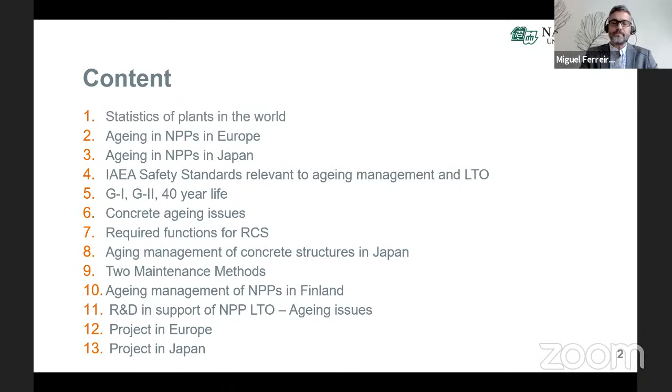And more than a quarter, 27%, are even over the age of 40. So we have a lot of power plants that are aging, and most of these power plants were given in the beginning an operating license for only 40 years. So these plants have reached this age, or are reaching this age, or in some cases have already passed this age. And we know that when structures age, their performance starts to decline. This is natural, subject to different types of loading, mechanical and from the environment.

And that is the main reason why we have to have in place a program that manages the aging of reinforced concrete structures, whether we're talking about power plants or different kinds of infrastructure as well.

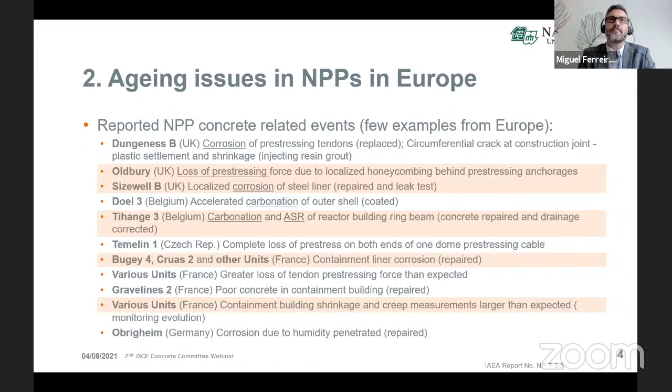Here is one case I would like to highlight, where we had ASR found in the roof ring beam. So we have the containment structure, and on top of it there's a circular beam around the roof. There was very poor drainage on top of that roof, so there was accumulation of water, and because of this, the humidity was high. And the aggregate was reactive, so ASR occurred on that ring beam.

Otherwise, the concrete structures of nuclear power plants are subject to the same aging mechanisms: chloride-induced corrosion, ASR, sulfate attack, etc. However, what makes the aging different in the case of nuclear power plants is the uniqueness of the structures themselves.

The containment building, for example, is a structure 1 meter thick or more, and it's very heavily reinforced, more than conventional structures, with pre-stressing tendons, sometimes both in horizontal and vertical directions, and it can have a steel liner embedded or on the surface. Sometimes there's even a double containment. So this makes the typologies we are dealing with quite unique, and we don't have experience with those kinds of typologies and aging mechanisms.

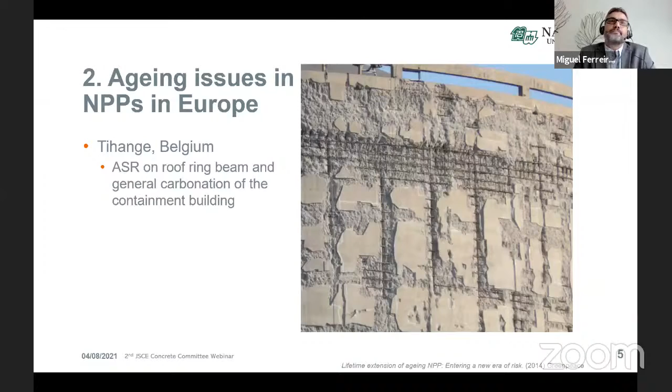So now about Japan, Professor Maruyama.

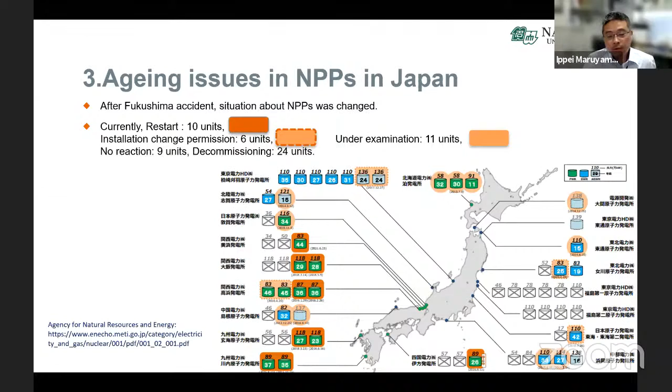So we really need to investigate and prove the soundness of the structure of these nuclear power plants. After the Fukushima accident, the situation about nuclear power plants in Japan changed dramatically. Currently 10 units have restarted, 6 units got permission to make installation changes, and 11 units are under examination. 24 units are under decommissioning due to reasons brought by social environment change after the Fukushima Daiichi accident. So even though many nuclear power plants will be decommissioned, the utilities still want to operate the nuclear power plants. That is our situation. Could you go to the next one?

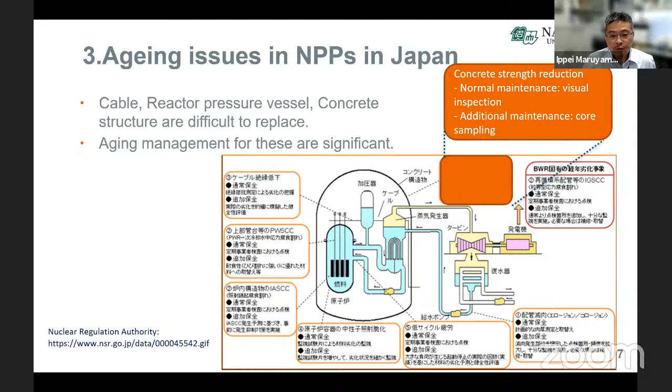In Japan, we are also concerned about the seismic performance of nuclear power plants, so the concrete strength and stiffness change are crucial. Generally, periodical visual inspection is conducted as normal maintenance, and additionally, evaluation of the concrete performance using core samples is conducted. So that is the situation of the nuclear power plants in Japan.

Please go ahead. Thank you.

So there are standards, many different levels of standards from different origins. The IAEA, which stands for the International Atomic Energy Agency, has safety standards that reflect international consensus on what is considered a high level of safety for protecting people and the environment. These standards cover all types of nuclear and radiation applications, and they come in three different types: safety fundamentals, safety requirements, and safety guides.

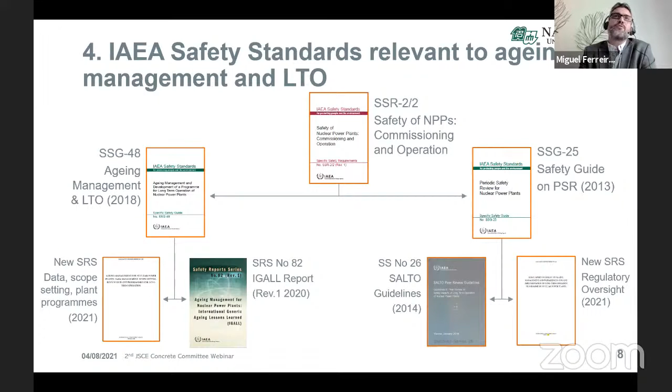There's a lot of information, but this is general, more high-level information and not very specific to concrete structures. It talks about SSCs, system structures and components, in a generic sense. I have taken one figure out of that, and this is quite a well-known figure.

There's a lot of information on this as well in the IAEA documents, and I would encourage you to look into this in depth, as most aging management programs are developed based on this framework.

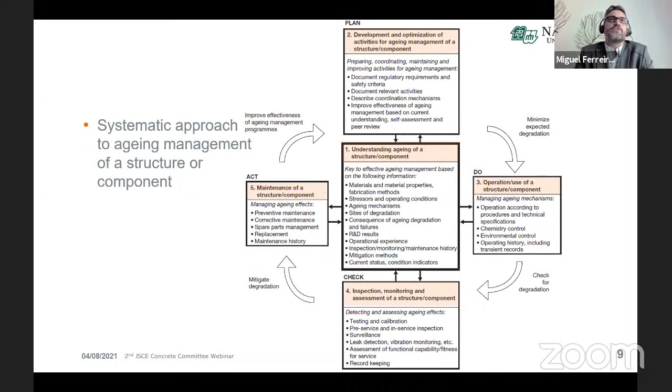Oh, sorry. Did I jump a slide? Have I jumped a slide? No, okay.

Many people ask, why have reactors been designed for 40 years when we can design bridges already for longer service lives than that? The reason is that the limitation of 40 years wasn't a scientific or engineering limitation, but a limitation by the Atomic Energy Act that limited all operating licenses of reactors to 40 years. So it was never really a question of technical performance.

That is why many plants that were designed for 40 years and have been operational for 40 years are actually now already performing, in some cases, up to 50, and they have intentions to go up to 60 as well. So this 40-year design life was never an engineering barrier.

Generation 1 are prototype reactors, developed in the 50s and 60s, and most of these are shut down.

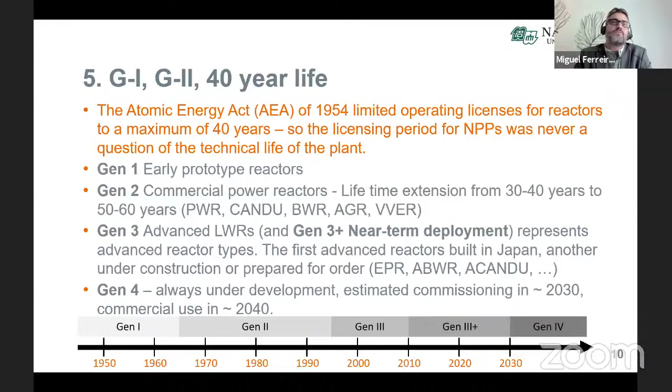Professor Maruyama. Okay, thank you.

Regarding the concrete aging issues in nuclear power plants, as Miguel said, for the extension of the life of nuclear power plants, we have to evaluate and prove the soundness of the concrete structures, and for that purpose...

There are many discussions, and there is a reference published by the United States NRC, reference number NUREG/CR-7153 Volume 4, published in 2014. Based on a discussion among experts in the related field, this document identified the following issues to be studied. The first one is creep of post-tension.

The impact of moisture on creep, multi-axial impact, and the coupling with accidental loading - we have qualitative information, but quantitative information is very difficult to predict. For this purpose, we need additional research.

And the impact of irradiation on concrete - we have some basic information, but everything is not clarified yet. So we need additional research on the impact of irradiation on concrete.

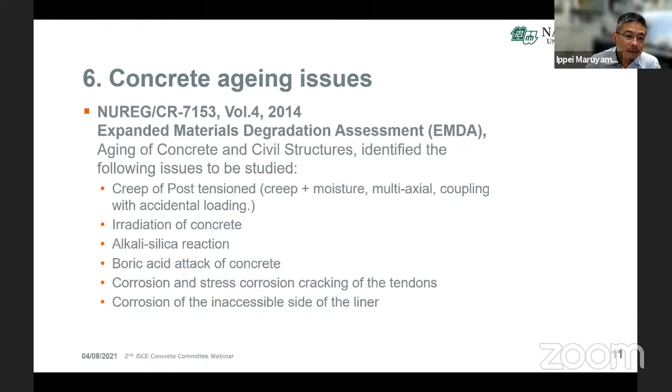So there is some difference between the concrete in nuclear power plants and the concrete used in general civil infrastructures. That is related to the required functions. The usage function is very general - common to general civil infrastructures. But other than this, there are functions specific or characteristic to concrete in a nuclear power plant.

The supporting function is to support the equipment to generate electricity. The pressure proof function is for the accident. The shield function is to attenuate the radiation from the reactor. And the leak-proof function and negative pressure holding function are functions to keep safe conditions against radioactive materials.

The secondary accident prevention function is a kind of meta function, which means that building elements shall not be damaged, fallen, or overturned so as to interfere with the functioning of more important facilities. So we have to think about any kind of accidental phenomena and keep the safe condition of nuclear power plants.

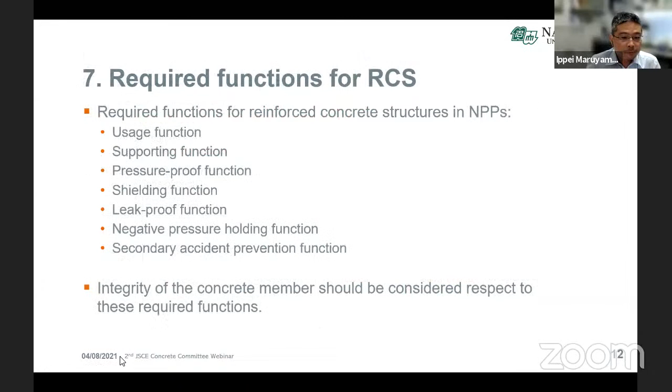So the integrity or soundness of the concrete member should be considered with respect to these required functions.

In case of the aging management of concrete structures in Japan, after the Fukushima accident, our new nuclear reactor regulation law came into force on July 8, 2013, and an approval system of extension of operation period of nuclear power plants was introduced. So companies are allowed to operate nuclear power plants up to 40 years, and after that, they can apply for permission to extend the operation period just one time. So in general, the lifespan is 40 years.

But if we get permission from the regulatory body, the utility can extend the operation period up to 60 years. The extended operation period of a nuclear power plant will be at most 20 years, as I mentioned.

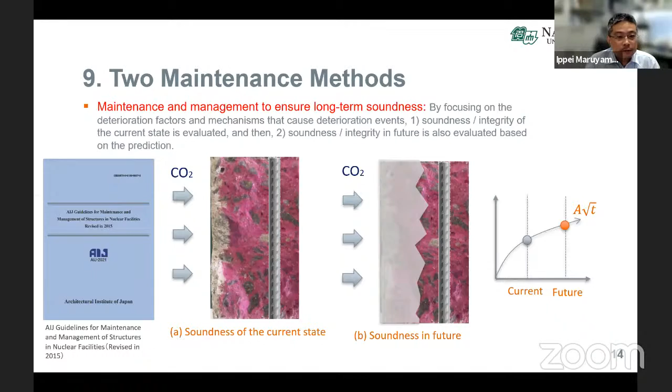So Miguel, I return to you. It's muted. Miguel, it's muted.

Thank you. I'll talk a little bit about aging management in Finland, defined in the YVL guide A8, aging management in a nuclear facility. The regulator in Finland, STUK, has adopted an approach where it specifies the aspects that need to be addressed by an aging management program of a power plant, but allows the plant to decide how to address them. For describing aging management procedures and identifying aging mechanisms, there's no specific guidance, but utilities have to take the initiative and show the regulator what procedures they have in place, how they plan to identify foreseen and unforeseen aging mechanisms. So the guidance comes from the regulator, but the onus is on the utility to demonstrate that what they have adopted can fulfill the regulator's demands.

I have a list of some aspects the power plants have to fulfill. For example, they have to document all procedures, or have procedures in place that identify existing or new aging mechanisms. So how do you identify new aging mechanisms? This obviously means you need to be up to speed with R&D.

I have another slide which shows a bit more, and I'm not going into detail, but this document is complemented with an annex at the end with a detailed list of aging mechanisms that might occur at nuclear facilities, as assistance to the power plants. If you're interested in reading this document, it's quite long. I leave you the link to the website where it can be downloaded. All the Finnish regulator guidelines are in English, Finnish and Swedish, and can be downloaded for free from this website, if you have more interest in going deeper.

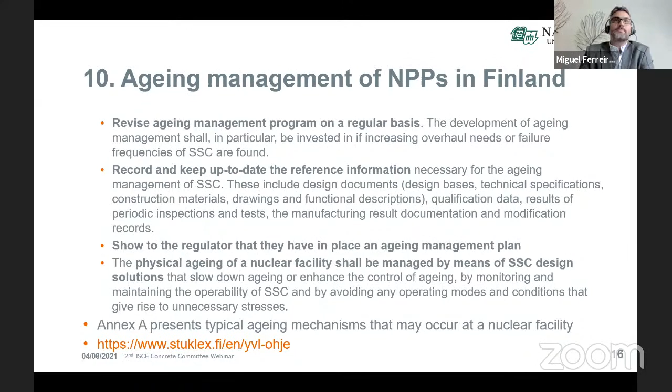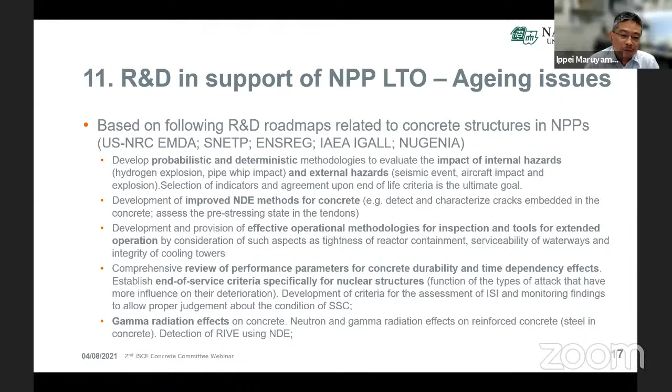I didn't read everything, but please check this list afterwards. I think if you find it interesting, this list of research topics needed from the Nuclear Power Plant Society will be interesting.

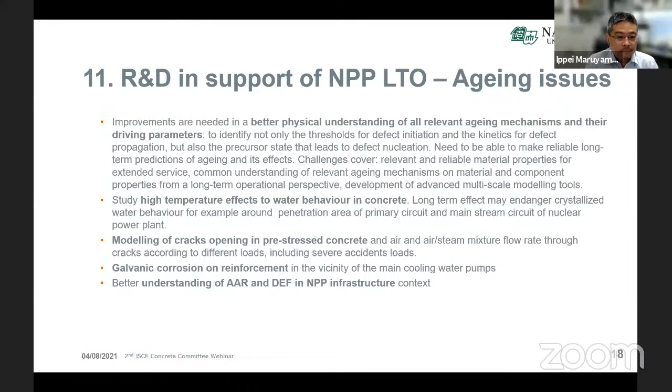Yes, thanks, Ippei. Definitely look at this quite comprehensive list of topics, and I'm sure there are many more. Coming towards the end of the presentation, we'll talk a little bit about projects in Europe and Japan addressing aging management issues in nuclear power plants.

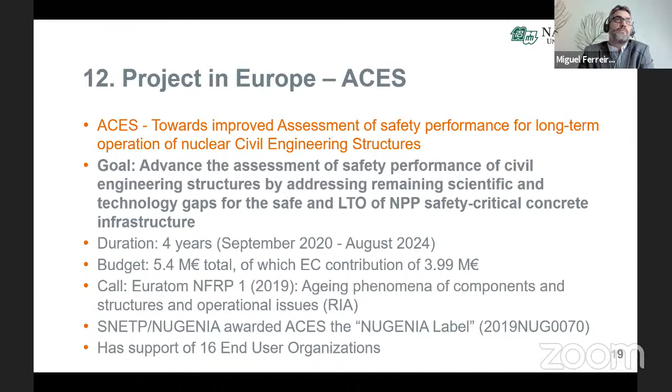One project in Europe is called ACES, titled Towards Improved Assessment of Safety Performance for Long-Term Operation of Nuclear Civil Engineering Structures. The goal of this project is to advance the assessment of safety performance of civil engineering structures, by trying to address the remaining scientific and technology gaps for safe and long-term operation of safety critical concrete infrastructure. I am really happy and lucky to be the coordinator of this project. It started approximately a year ago.

So we have work package 1, which is looking at the aging management aspects in general, looking at the documentation and processes, etc.

And then we have 4 work packages which go from work package 2 to work package 5, which are looking at very specific knowledge gaps. Work package 2 is looking at embedded liners and the corrosion of these. Work package 3 is looking at internal swelling reactions, so this is ASR and delayed ettringite formation as well. Work package 4 is looking at delayed strains of the containment building, effects of creep and shrinkage, and temperature and moisture. And work package 5 is looking at the performance of irradiated concrete. So these are the 4 main, let's say, technical work packages.

We have a very strong interaction with the end user group. We have 15 or 16 end user group partners at the moment, and I think we have one partner from Japan, which is Kajima Corporation, and we're very happy to have them with us as well. And then all this information feeds into a dissemination and communication work package.

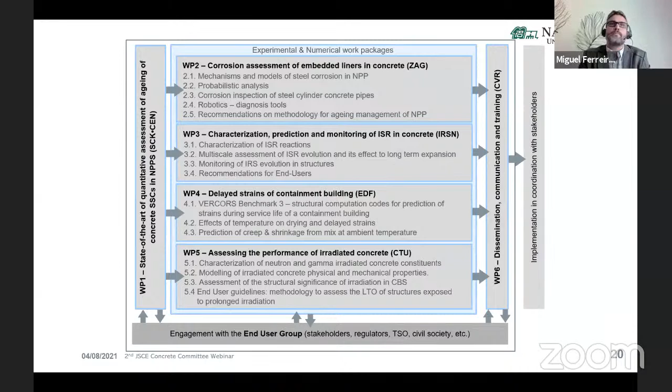Thank you. Japan also have several large concrete projects for the long-term operation of nuclear power plants. I would like to introduce 2 of them, which we have a role of the technical lead.

So first is the so-called Hamaoka project, funded by the Ministry of Economy, Trade and Industry of Japan. Units 1 and 2, owned by the Chubu Electric Power, are under decommissioning. The objective is to improve the assessment of soundness of the RC members in the nuclear power plants based on new information from the data harvested from the decommissioning of nuclear power plants, and enhanced non-destructive methods validated by the data from the real members and the numerical analysis.

In the project, we took more than 500 cores from the real structure, which have been exposed to different or specific environments in the nuclear power plants. We found that there is some similarity with the Roman concrete, and we can find aluminum tobermorite formation in the concrete under the irradiation condition. So from a scientific viewpoint, this is also very interesting.

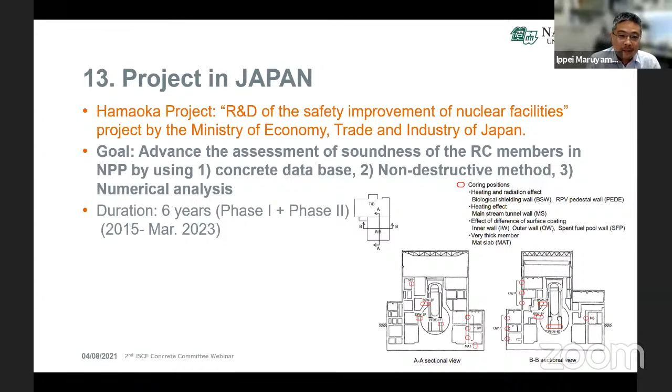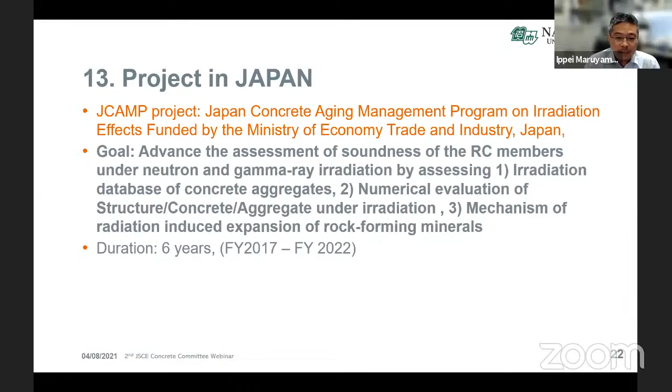Thank you. So the other is a project named the Japan Concrete Aging Management Program on Irradiation Effects. This is also funded by METI, and the degradation mechanism of concrete due to neutron irradiation is investigated. The detail will be introduced in my next presentation.

And this project is under the umbrella of the US-Japan Civil Nuclear Energy Research and Development Working Group. As you see, many research institutes joined this project.

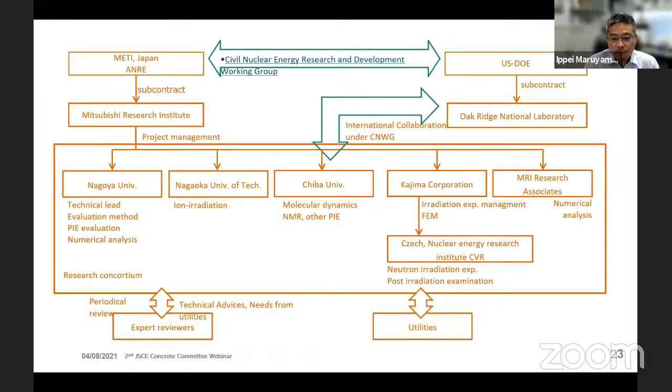And finally, as concluding remarks, what I would like to say is the social demands require accountability from all parties involved, and the aging management of concrete structures requires transparency throughout the whole process. The long-term operation of nuclear power plants needs a solid scientific background, and engineers should pursue a process beyond engineering design when assessing reinforced concrete structure performance in support of LTO. So that is why we should do the research for the LTO. Thank you for your listening.

Thank you very much. Thank you for a very valuable presentation, Dr. Miguel Ferreira and Dr. Ippei Maruyama. So there is much valuable information on nuclear power plants, including the background, current situation, and management system of nuclear power plants in Finland and Japan. And also there are remarkable degradation phenomena and research projects as well.

Okay, so I'd like to move on to the next session. So among these topics of the overview, today we are focusing on the internal swelling reaction, which is ASR, and the irradiation of concrete materials. So first we will have advanced topics of ASR research from Dr. Miguel Ferreira. So could you prepare?

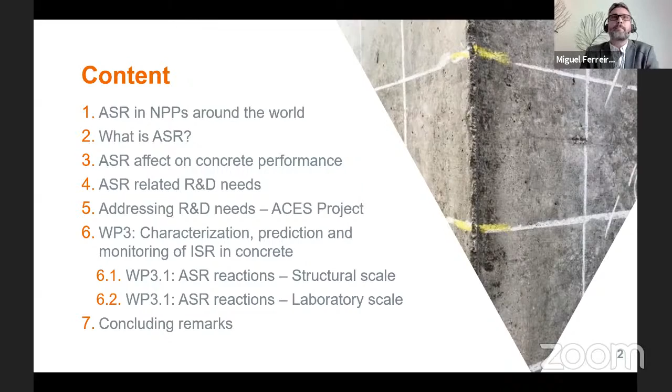ASR can occur in any concrete structure given the right conditions, and now we have several decades of power plant operation and aging. So we have already seen signs of ASR in several NPPs, and here is an example of a few of those, taken from public references.

In Belgium we have the Tihange 2 NPP, and I've already mentioned in the previous presentation the ASR in the ring beam of the containment structure. In Japan, in the Ikata 1 power plant, ASR has been observed in the foundation of the turbine generator. In the US, at Seabrook nuclear power plant, ASR has been detected in many of the concrete infrastructures in that facility.

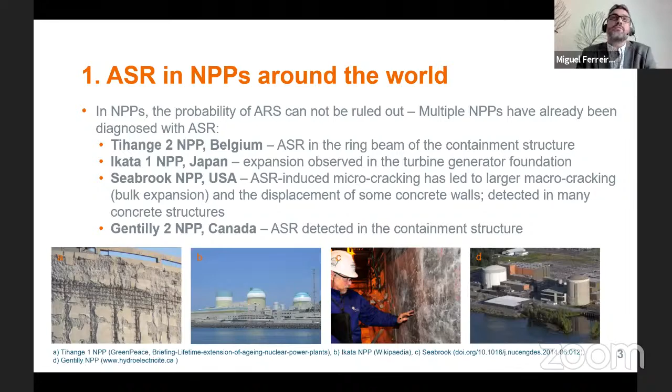In Canada, in Gentilly 2, ASR has also been detected in the containment structures and at some of the support structures as well. So basically, given the right conditions, ASR will start to manifest itself independent of what type of structure it is. So what is ASR?

Basically, it's a series of chemical reactions that occur within the concrete, and these involve three main parts. The first part is a reactive aggregate - some form of reactive, amorphous silica - and this is attacked by the second part, which is the hydroxyl ions, OH minus, present in the pore solution of the concrete.

These ions help accelerate the dissolution of the amorphous or affected silica in the aggregate. The sodium and potassium ions keep the pH in the pore solution very high, and this helps keep the solubility of the silica at an adequate level. And of course, the last part of this reaction is the need for humidity or water,

which acts as a solvent and also as a carrier for the hydroxyl and alkali ions. If there's enough humidity in the concrete, typically references say over 80%, then there's the formation of a viscous gel - a sodium silicate or potassium silicate, depending on the alkali ions.

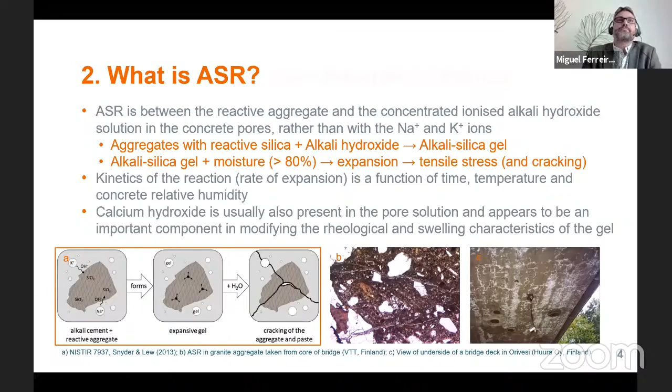So how does ASR affect structures? Well, the swelling or expansion of ASR, if the structure is unreinforced and if it's more or less evenly spread out, is volumetric and isotropic.

But this is not always the case. Often the concrete is reinforced, and the reactive aggregates are not necessarily uniformly distributed - they might be in batches or pockets. This gives an anisotropic aspect to the expansion, and when confined, for example with reinforcement, the expansion is usually redirected along the direction of least confinement.

Mechanical properties of the concrete are affected by ASR - for example, tensile and shear strengths and elastic modulus. These are all affected by the occurrence of ASR in concrete structures.

There are recommendations in guidance documents for affected structures, to start with monitoring the width and extent of the cracks, to build an understanding of how the aging mechanism is affecting and evolving with time. Usually there are crack width and crack index values that should trigger actions, also defined in guidance documents - what kind of action should be done, testing, looking at the microscope, and understanding what is reacting in the concrete and how.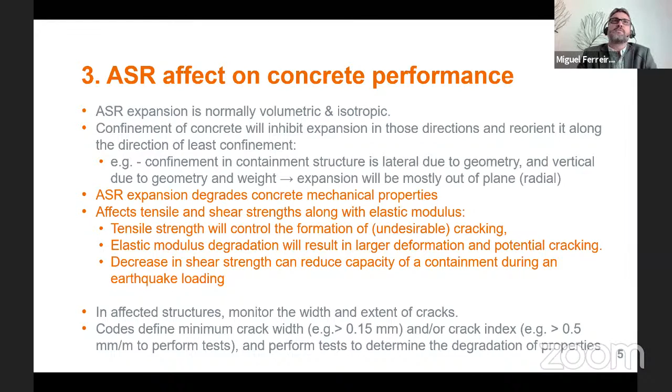There are several different types of performance tests that can be conducted in the laboratory. These can assess the reactivity of the aggregates, or the reactivity of a specific concrete mix design. The tests can also measure the potential or residual expansion of a concrete. We take a core from a specific structure and see what is the potential or residual expansion of that, which gives us a partial image of how the structure might react to ASR.

Ultimately, the goal is to take the results we get from laboratory testing and correlate them to some kind of performance of the structure in situ. But this is not something that's very trivial. In fact, it's actually quite hard, and this is where there is still a great need for research. This is what we are addressing in this project.

Some of the factors that affect this process are listed in the slide. If we think, for example, on one hand we have a rather small lab sample, and on the other hand a 1 meter thick large wall - what is the volume to surface ratio of these two? What are their thermal conditions, how are they different? What is the spatial confinement by own weight, by reinforcement? What are the moisture conditions, the alkali availability, the solubility of portlandite, the calcium availability, and the spatial distribution of the reactive aggregates?

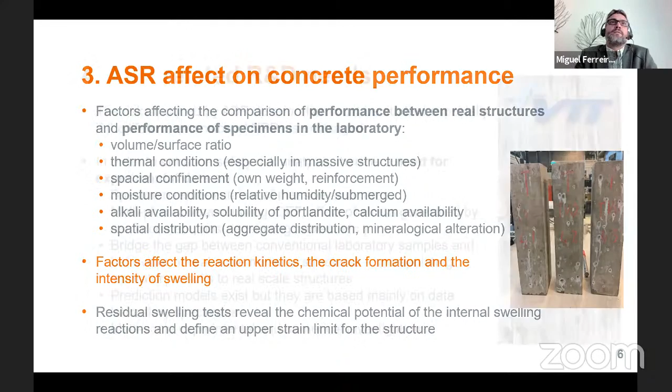But there are many others, and these have been identified in different roadmaps and different R&D needs, and they are listed here in this slide. For example, more representative specimens in testing, looking at multi-phenomena coupling - ASR doesn't just occur by itself in the structure, it can be coupled to other aging mechanisms, and that needs to be looked into deeper as well. And as I mentioned, looking at conventional laboratory samples versus real scale samples, and there are others there, so I'll let you read through that.

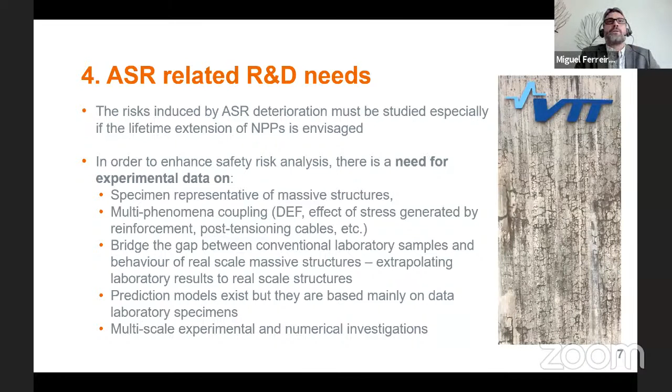Now I want to go a little bit more specific into the actual project. We have the ACES project, funded by the European Union, and the goal was to advance our understanding of safety performance of civil engineering by addressing the remaining scientific and technology gaps for safe and long-term operation of safety critical concrete infrastructure. I repeat this figure shown in the previous slide, but now we focus on the aspect of ASR. In that figure it's ISR, meaning internal swelling reactions, because in this project we actually look at both ASR, alkali silica reactions, and also delayed ettringite formation. But today I'll only talk a little bit about ASR.

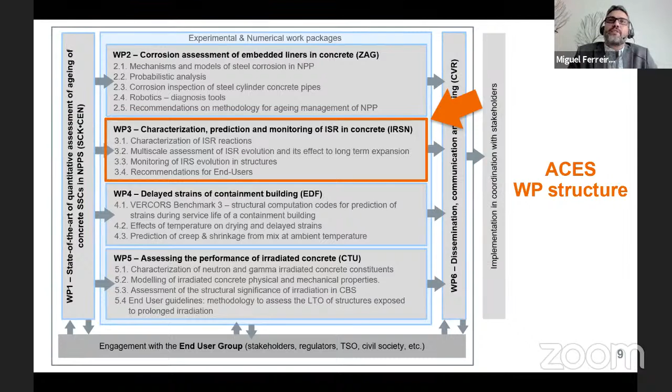The main goal of work package 3, dealing with these internal swelling reactions, is to contribute to the assessment of lifetime extension of concretes affected by these reactions. Now we have a detailed view of the research being carried out in this work package, which is being led by a colleague from IRSN in France, Dr. Jacques Jabbour. If you look at the figure, you see that the work package is made up of 4 tasks, and that they feed into each other and also feed into the final task, which is task 4 at the bottom.

Task 1, which is what I will talk about today, concentrates on the experimental characterization of ASR. This means increasing the knowledge on the development of ASR in NPP structural environment, by looking at factors such as the confinement developed in massive structures, the coupling between creep and shrinkage and expansion due to ASR, and the scale effect between lab samples and in situ performance.

Task 2 addresses modeling and the prediction of long-term expansion of structures affected by ASR in power plants. The objective of this task is to develop a series of numerical models that simulate the occurrence and evolution of the swelling, the expansion in the concrete. This includes spatial propagation, mineralogical alterations that can occur, and crack formation and intensity.

The modeling activities will be conducted on several different scales, starting from microstructural and pore scale, which will provide process understanding, continuing into mesoscale and macroscale to make predictions on the scale of the real structure. From these models, we also propose an engineering model, a tool that would help the owners of the NPPs in the decision-making process. So this is one of the outcomes for that task as well.

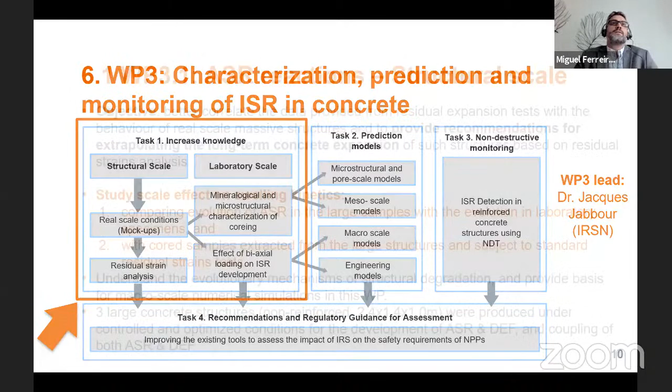Starting with the structural scale, as I mentioned previously, laboratory studies are conducted on relatively small sized samples, and these do not represent or reproduce real conditions of the concrete structure in its performing environment. So kinetics of the reaction, volume to surface ratio, thermal conditions, etc., all vary.

In this structural scale task, the idea was to better correlate the data provided from residual expansion tests, made on core samples, with the actual performance of the structures—the actual structures of concrete. And to study the scale effect on the swelling kinetics, based on looking at large block samples that have been prepared, and cored samples which have been tested in the laboratory and measured to obtain residual strain tests. So how has this been taken forward?

Very large scale concrete blocks, non-reinforced, were produced. The dimensions are 2.4 by 1.4 by 1 meters. These were produced under controlled and optimized conditions, and then developed to look at specific expansion internal swelling reactions.

One is ASR, the other is delayed Ettringite formation, and also the coupling of both of these—so at the same time having ASR and delayed Ettringite formation, hence the 3 blocks. Experimental protocols to accelerate the ASR or the delayed Ettringite formation were developed, depending on the different mechanisms. These would allow us to better observe the expansion reactions in the structural scale.

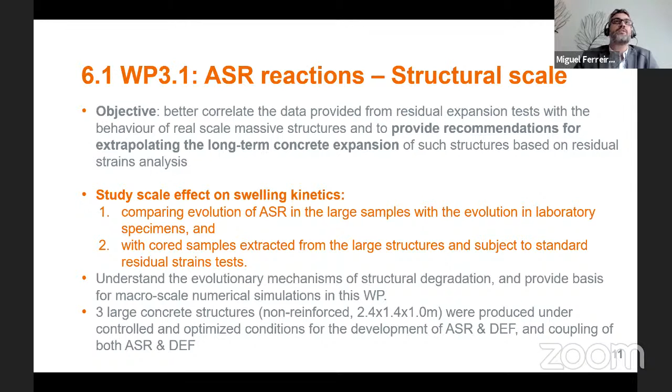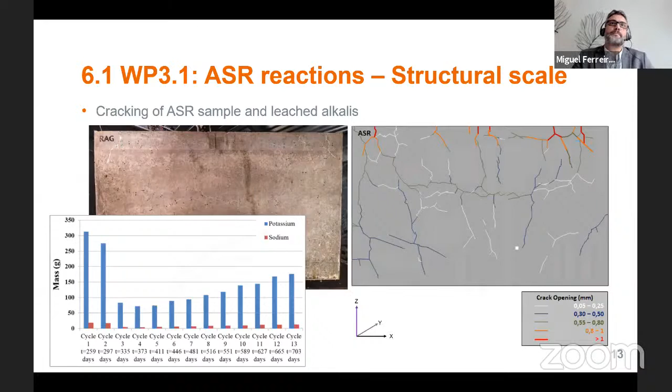A little bit about the residual expansion test. These make it possible to assess the damage of ASR and whether this is going to get worse in the future or whether the expansion has stabilized. It's also one of the main data sets used in numerical simulations, allowing calibration of the chemical processes of the reactions in the models. It defines a kind of chemical potential of the ASR, defining an upper limit, a strain limit for the structure.

So we have expansion in the blocks, expansion in the cast specimens of the same concrete stored in similar conditions, expansion in the cores taken from the blocks when the tests were started, and expansion in the cores taken from the blocks when the expansion leveled out. So lots of data collected, and this provides an opportunity to isolate the effects of scale, because the composition and environmental variables are relatively constant between the small-scale lab samples and the large blocks.

So the next step is to try to answer the questions of the owners. Can we estimate the past expansion? Can we estimate future expansion? How will ASR increase as a function of time? How do we address ASR, and how does it affect the performance of the structures? This is the way forward for the ACES project.

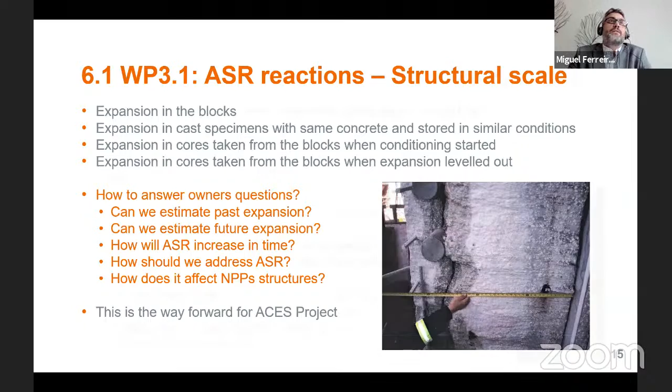Now moving on to the laboratory scale, the objective here is to determine which parameters are crucial for the advanced numerical simulations, and additionally what kind of microstructure and mineralogy output is needed as input for pore scale and mesoscale models. These two will feed into task 3, where the modeling is done, so the laboratory scale task is providing a lot of input and data for the modeling in task 3. To address these two goals,

two experimental campaigns have been prepared at the laboratory scale. In the first, the interaction between the expansion due to ASR and the mechanisms affecting the delayed behavior of pre-stressed reinforced concrete structures is being studied. This delayed behavior includes creep and shrinkage due to biaxial compression constraints—think of a containment structure of a nuclear power plant, many of which have vertical and radial or horizontal pre-stressed tendons. This is a rather unique type of structure, and very little research has been done on how this affects the evolution of expansive reactions in concrete. We're also looking at the effects of shrinkage, endogenous and drying shrinkage, and early age hydration, heat release, and thermal deformations.

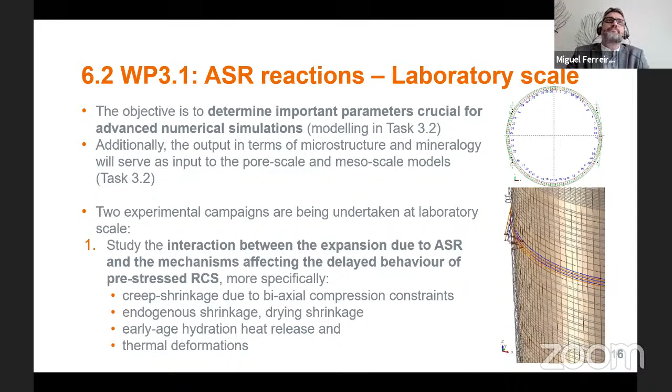Looking a bit deeper at the creep and shrinkage due to biaxial compression constraints, this is ongoing at the moment, so I don't have much more information I can provide.

But several preliminary studies were done to determine the optimized dimensions of slabs to be used, and a number of parallel tests, taking into account the number of tests we want to do, all the variables, and the space available in the laboratory. These are some of the constraints we have, which if you've conducted any research you understand very well. So the chosen slab was 40 by 40 by 10 centimeters.

These slabs will be biaxially compressed and maintained at different conservation temperatures. The specimens are not reinforced, and are compressed by a steel frame, as you can see in the finite element modeling image. The stress is applied by hydraulic jacks, and these frames will then be placed in a pool of water for the ASR case, or in different temperature and humidity conditions for the creep and shrinkage case.

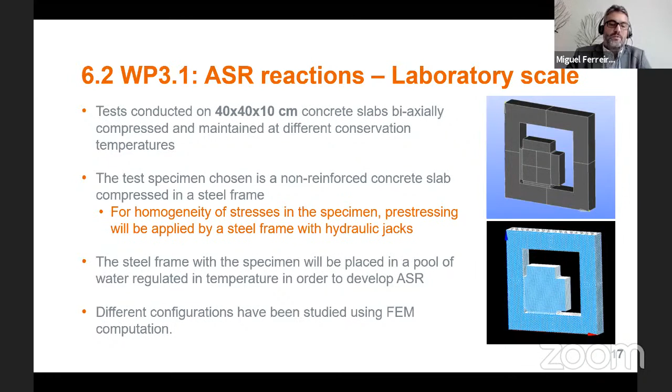So here are some of the variables we are dealing with. Different types of pre-stressing: samples that are not pre-stressed, samples that are uniaxially pre-stressed, samples that are symmetrically biaxially pre-stressed, and samples that are asymmetrically biaxially pre-stressed.

For temperature and humidity conditions, ASR samples will be placed in water at 38 degrees. For delayed strains, samples are kept at 50% relative humidity and stored at 20, 38, and 50 degrees - three different conditions reflecting different temperatures found at nuclear power plants and different working conditions. Three different concrete mixtures will be used as well.

One of these will be the VeRCoRs concrete, from another project undertaken by EDF in France, where they built a 1:3 scale containment building and tested it comprehensively. We want to build on the data from that project and complement it with data from this one, so we'll use the same concrete mix there as well.

The chosen temperatures are meant to accelerate the ASR, and as I said, they represent different locations and ages of concrete at different power plants. So the challenge really is to isolate the different aging mechanisms acting on the delayed behavior of concrete.

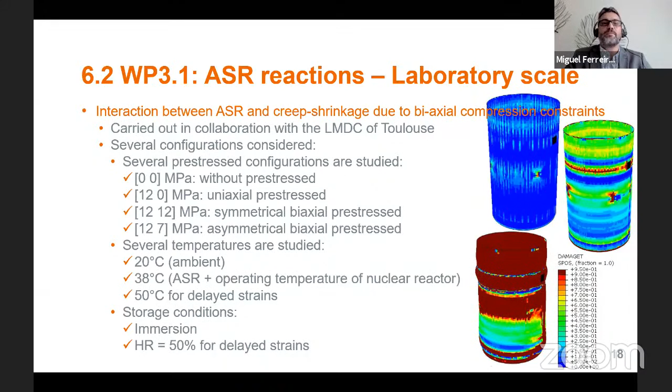The second part of the laboratory scale tests is simple mineralogical and microstructural characterization, taken from the real scale blocks. If you recall those large scale blocks that were tested, we will take additional cores from those and do a very comprehensive list of tests to obtain data, which will serve as input to the pore scale and mesoscale modeling.

And if there is any further need for laboratory testing with regards to either ASR or delayed Ettringite formation, then these tests will be performed as well. So there is that possibility.

This brings me to my last slide, which I'd like to conclude with, just to say that ASR is a really complex deterioration mechanism, and problem solving of NPPs affected with ASR requires really detailed understanding. These are normally very complex situations that often require rather deep knowledge and sometimes even further R&D support. There's really no quick solution to deal with ASR - we need good observations, monitoring.

Understanding of how it is performing over time. We need to perform adequate petrography. We need to understand the type of expansions, and we have accelerated tests for those. We need to reassess the structural performance based on the data collected from changes in mechanical properties and the type of expansion we can expect. And we need to keep up to date with scientific literature.

We need to see what are the novelties, what have we learned, and how can that affect what we want to do. Especially for NPPs and aging management, a good practice is also to request a second opinion or a peer review of all the steps in the processes you're using to deal with ASR from an aging management perspective.

Of course, it's very important to learn from the operational experience of other nuclear power plants and other large infrastructure owners like road authorities or dams. There's a wealth of information out there, and we need to reach out, talk, discuss, and learn from the experience of others as well.

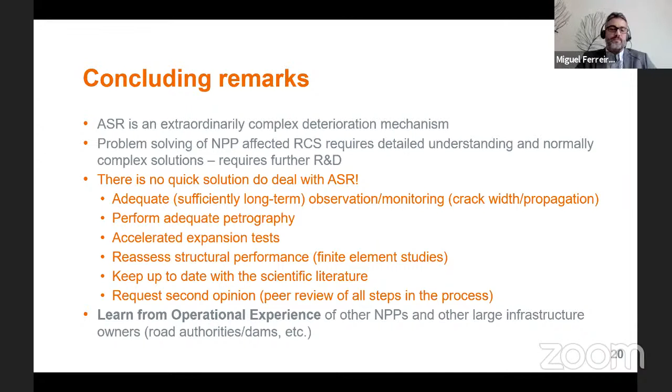And with that, I end my presentation, and I thank you very much for your patience. I hope we have some interesting discussion later on as well.

Thank you so much for your very interesting presentation. Yes, it's very difficult to connect the experimental data to the structural scale.

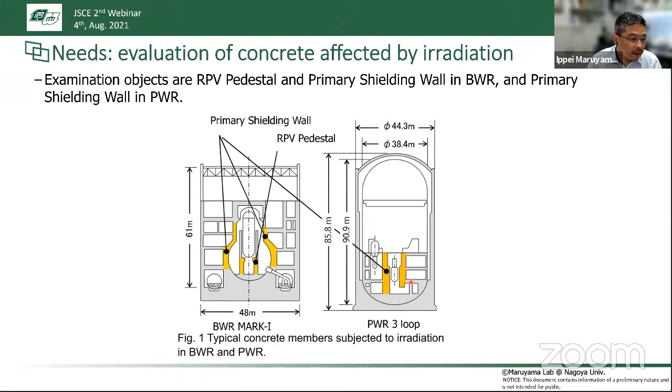To evaluate the soundness of the RC member in neutron and gamma irradiation environments, previously for neutron fluence, 10^20 neutrons per square centimeter—meaning how many neutron particles attack the target concrete—is used as the reference level. And for gamma ray irradiation, 200 megagray is used. These values are based on Hilsdorf's review paper, published in 1978.

We look at each of the experimental conditions. The data shown in Hilsdorf's paper is not from concrete used in a light water reactor, or not an appropriate condition for the light water reactor. So we noticed there was a gap, and the scientific background on this issue was not sufficient at the time.

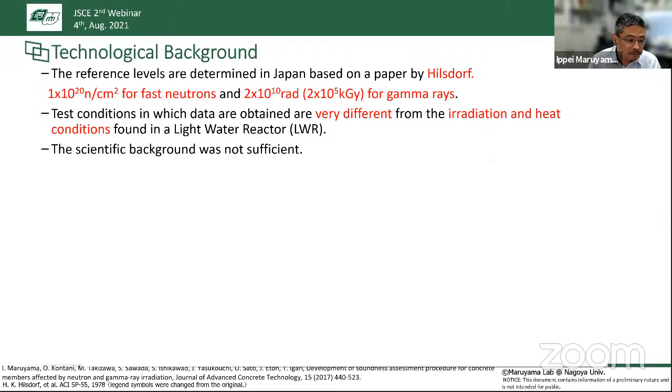By the way, do you know what causes the volume expansion of concrete under neutron irradiation conditions? Concrete can expand because of the aggregate. This is a result of the metamictization of alpha quartz. Metamictization means the crystal structure is destroyed by radiation.

Using electron energy loss spectroscopy, we can identify the electron density change, and based on this value, we can estimate the density change of alpha quartz under the electron irradiation environment. We found about a 4% reduction in density, meaning about 4% expansion of alpha quartz, under TEM observation.

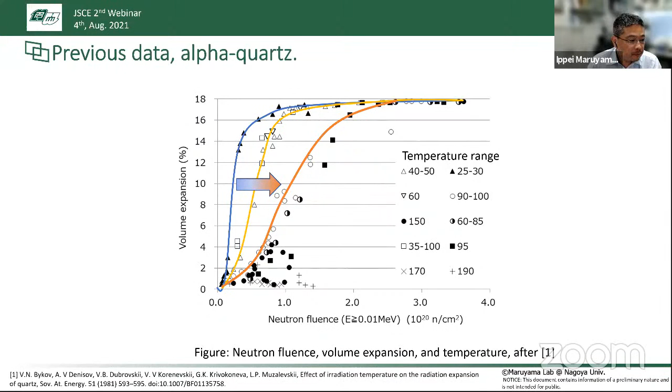In this NRA project, we set 4 sub-projects: neutron irradiation research, gamma ray irradiation research, heating and drying impact experimental research, plus numerical analysis project.

When neutron is irradiated on concrete, secondary gamma ray will occur, and when the energy of the neutron and gamma ray is absorbed in concrete, it becomes heat, and the elevated temperature will bring drying impact. Therefore, to identify the impact of neutrons, we also need to know the impact of gamma ray as well as the impact of heating and drying. That is why we set these 4 sub-projects in this project.

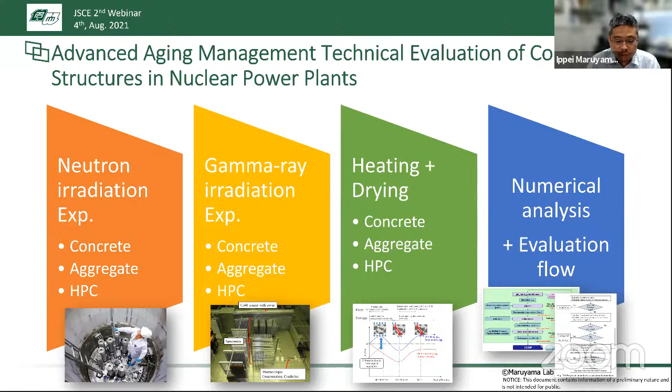Today, I would like to introduce the neutron irradiation experiment mainly.

For the neutron irradiation experiment, we use the Halden reactor owned by IFE Norway, which has already been permanently shut down recently. This is a heavy water reactor, suitable since the gamma ray flux is reduced during irradiation. As I mentioned, during neutron irradiation we see large temperature increase inside the specimen, so to get appropriate data, design of the specimen is really important.

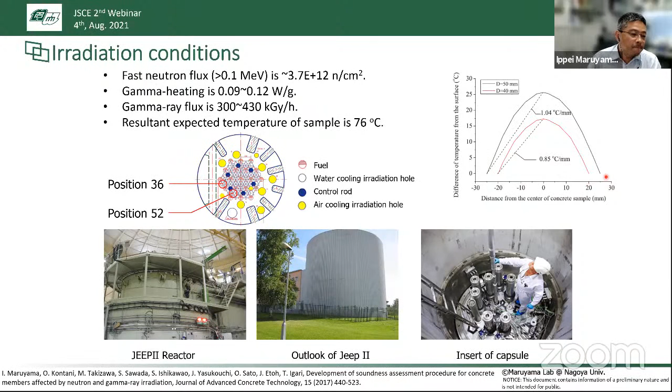In our case, 4 centimeter diameter concrete specimens were used, based on the estimated temperature distribution inside the concrete specimen. This is the view of the inside of the reactor, and this is the schematic figure of the design of the capsule which stores the specimens during neutron irradiation.

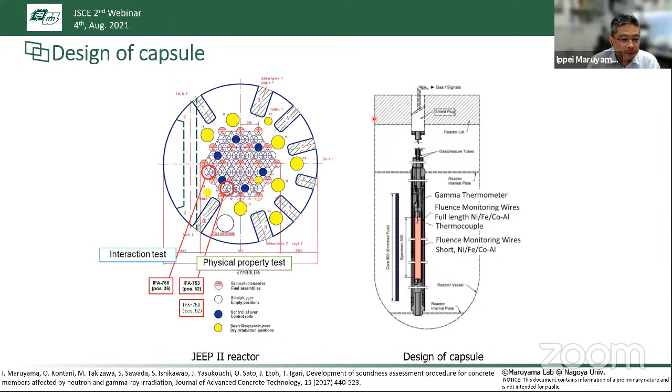In the capsule, for the irradiation experiment, we set 4 different neutron irradiation levels, and 2 different concrete specimens are prepared. The water to cement ratio is common, about 0.5, and only the type of coarse aggregate is changed. One is andesite tuff, which has a large amount of quartz inside, and the other is ordinary sandstone, whose alpha quartz content is about 50%.

In addition to these 2 concrete specimens, we also put small aggregate specimens, so 6 aggregate specimens were prepared. At the center of this setup, we put the hardened cement paste specimen as well.

Regarding the aggregate, we prepared 6 different aggregates: 1 is limestone, and 5 are sandstone, taken from over Japan. This is information about what kind of rock-forming minerals exist in the selected aggregates used.

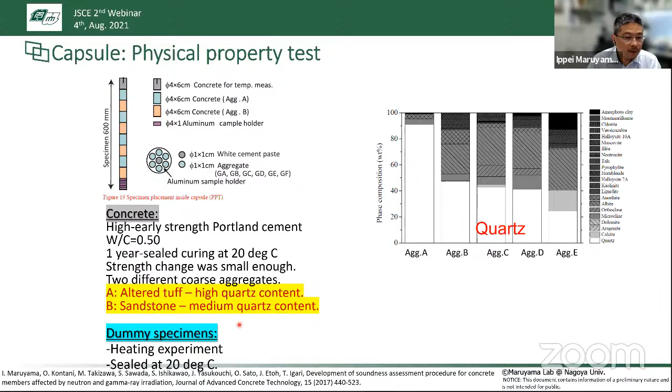So I would like to introduce the experimental results. First, we identified cracks on the surface of the concrete. This is evidence that something happens in the concrete after irradiation.

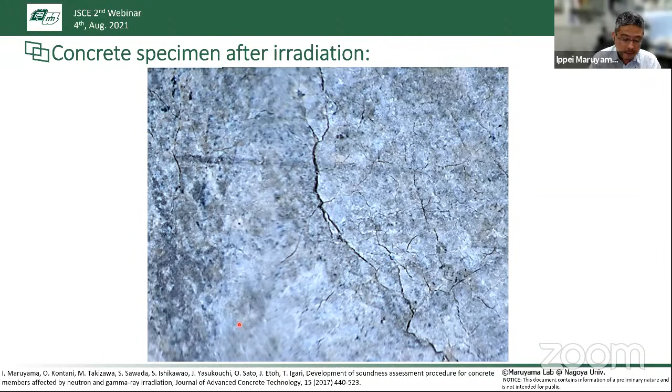These are the data of mass change and length change of the specimen after neutron irradiation. The X-axis is neutron fluence, meaning how many neutron particles attacked the concrete specimens. We see a large drying impact. The capsule maintained pressure to keep safe conditions inside, and during irradiation, vapor, oxygen, and hydrogen are produced due to elevated temperature and radiolysis. The valve releases these elements from the capsule. Therefore, we see the drying impact during irradiation.

On the contrary, we also see expansion, and the magnitude is quite large. In case of concrete with coarse aggregate with a high amount of alpha quartz, it expanded to 2.5%. In case of concrete containing sandstone, with about 50% content of alpha quartz, it shows less expansion, but the amount is still very large—almost 2% after a neutron fluence of 9 by 10 to the 19 neutrons per square centimeter.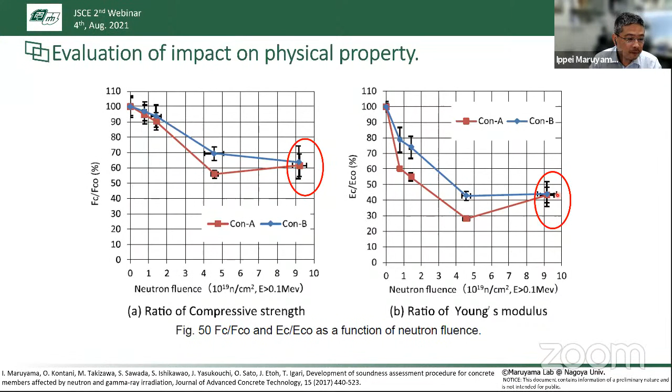This is the experimental results of the heating experiment. We copied the heating history of the specimen under the neutron irradiation, and after the same temperature history, we see about a 10% or 15% reduction of the compressive strength. In case of the Young modulus, we see about a 20 to 25% reduction. So only for the heating or drying impact, we still have some little deterioration.

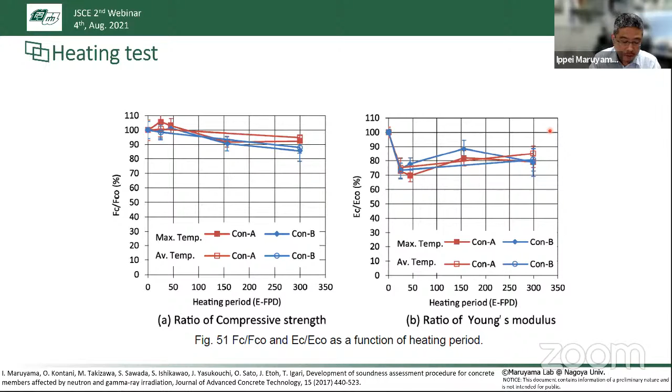Therefore, when we think about the impact of the neutron irradiation, we can say something like this. This data plots the experimental results of the compressive strength ratio as a function of the neutron fluence. We also plot the previous experimental data by the Russian research group or European research group. Based on this, up to about 20%, we can say this can be caused by the heat and drying impact. Above this value, we can say this is caused by the neutron irradiation.

So therefore, it can be concluded that the neutron irradiation impact was confirmed above 10¹⁹ neutrons per square centimeter, which is one order smaller than the used reference value. But this is quite consistent with the conclusion of Hilsdorf, and also the reference value proposed by the United States, US NRC.

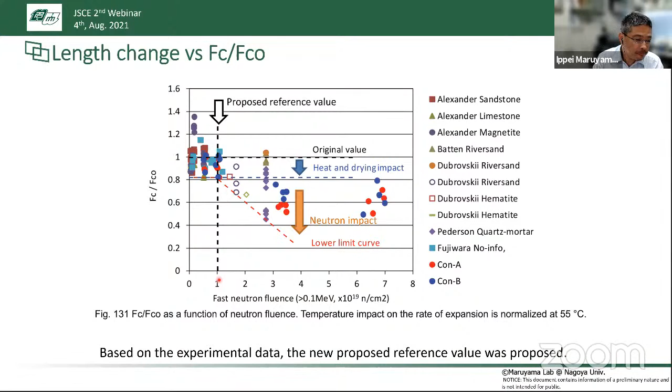So in short summary, the concrete expanded due to the neutron irradiation, and the compressive strength and the Young modulus are reduced due to the neutron irradiation. So the problem is, we have to identify the source of this expansion.

Now we move to the aggregate experiment results. As I mentioned, 6 concrete aggregates were irradiated and the length change was measured. 5 aggregates are sandstone, and the last one is limestone. Our working hypothesis was that quartz is sensitive to neutron irradiation. Therefore, sandstone aggregates containing different amounts of alpha quartz were prepared. The contents were quantified by XRD Rietveld analysis.

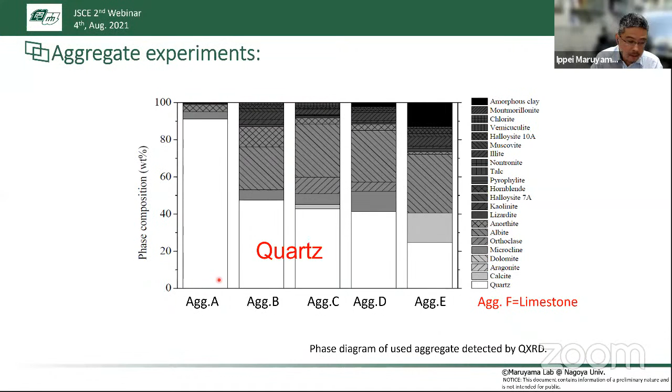And this is how the aggregate looks after the neutron irradiation. We see some minor cracks on the surface of the aggregate specimen.

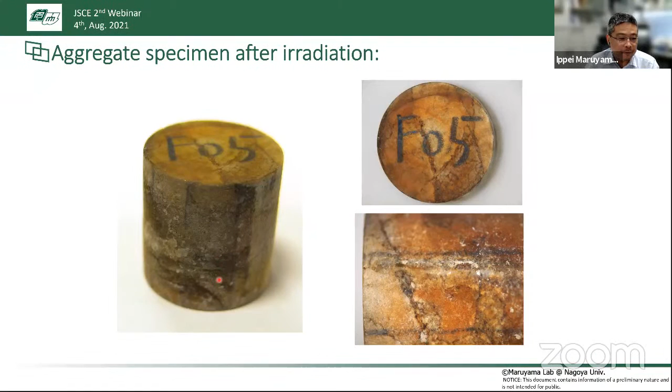This is the data of the aggregate expansion as a function of the amount of alpha quartz at different neutron fluences. The blue, orange, gray, and yellow represent different neutron fluence levels. As you see, at low neutron fluence, the expansion of aggregates is almost linear to the quartz content.

While in the higher neutron fluence cases, a fluctuation was confirmed. This indicates that rock-forming minerals other than alpha quartz are also possibly affected by the neutron irradiation, which is why we see this kind of fluctuation. But at lower fluence, the impact of alpha quartz is quite large.

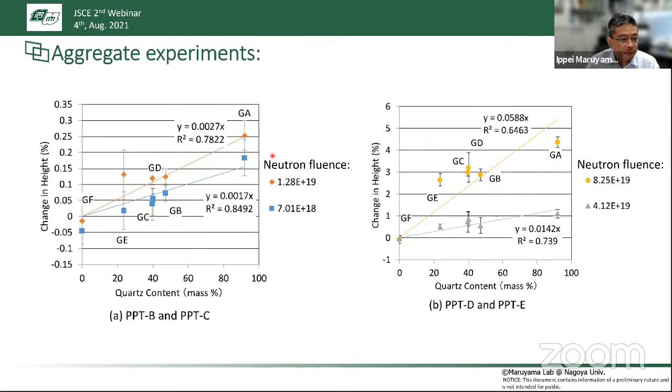This is the result of the X-ray diffraction pattern of aggregate B, the sandstone, at different neutron fluence levels. Red is the lower neutron fluence level, and blue is the higher neutron fluence level. We confirm the quartz peak, the Q peak, and the albite peak here and here.

We can confirm that the peak shifts to a lower 2-theta angle, which indicates that the structure expanded under neutron irradiation. Also the peaks become weaker after the neutron irradiation, and some disappeared, which proves that the crystal structure is destroyed after the neutron irradiation.

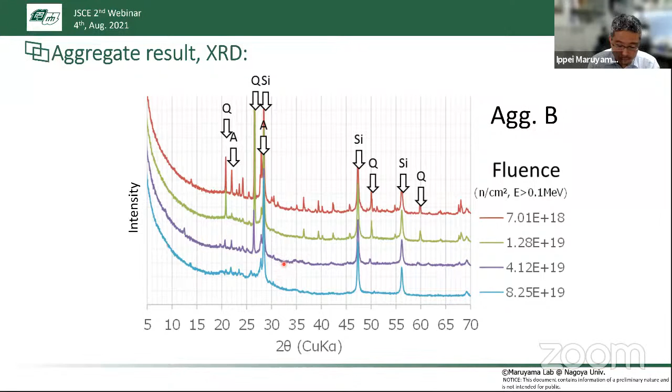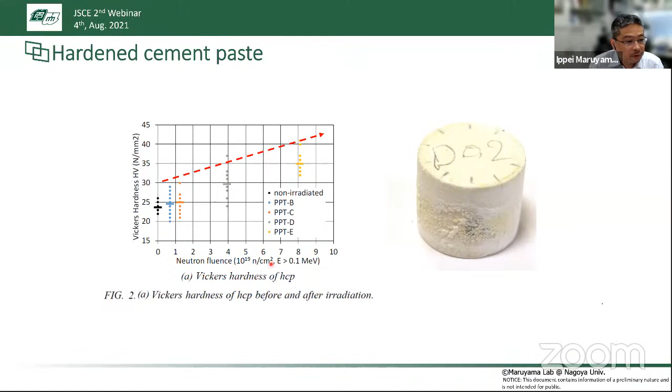And finally, I would like to shortly introduce the result of the hardened cement paste. There is no or almost negligible volume change after the neutron irradiation. And also we see the increase in the Vickers hardness of the hardened cement, as a function of the neutron fluence here.

So strength was increased, but the aggregate was expanded. Regarding the sandstone, quartz is the dominating factor, so feldspar group may contribute to the expansion at higher fluence levels. Metamictization was confirmed, so neutron irradiation destructs the crystal structure of alpha quartz and feldspar. So the conclusion is that the source of the concrete expansion and resultant degradation is due to the metamictization.

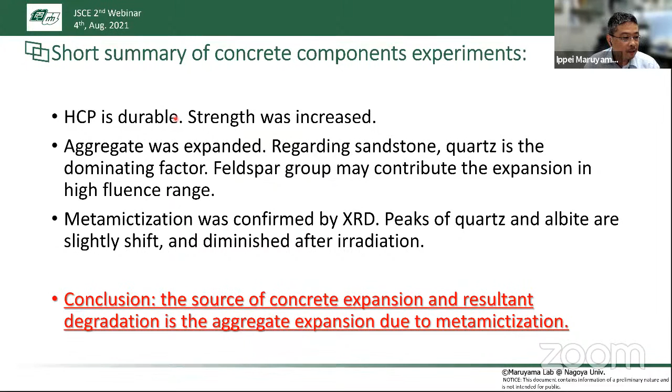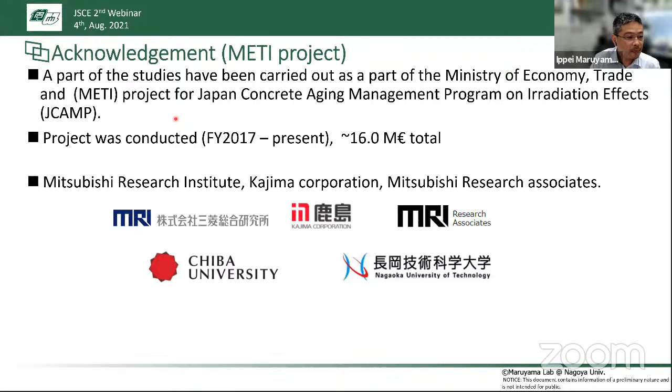So based on this knowledge, we continue the research. But I think the time is limited, so I would like to really shortly explain our current research.

Based on the knowledge of the NRA project, we have to cover all the aggregate used in the nuclear power plants in Japan. So for that, for any kinds of rock forming minerals in used concrete aggregate, we have to investigate the relationships between the expansion of the rock forming minerals and the neutron fluence.

Based on molecular dynamics and neutron irradiation experiments, we are collecting the data. And at the same time, at the aggregate level, we do irradiation experiments. Above this size, we are doing numerical analysis. Based on the rigid body spring network model, we can identify and make the bridge between aggregate expansion and the degradation of concrete properties - compressive strength, Young's modulus, splitting tensile strength, whatever.

And above this, we try to evaluate the behavior of a very thick concrete wall which is irradiated from one side, and also try to evaluate the seismic performance of the cylindrical structure which is affected by the neutron irradiation. So all kinds of scales are being investigated currently.

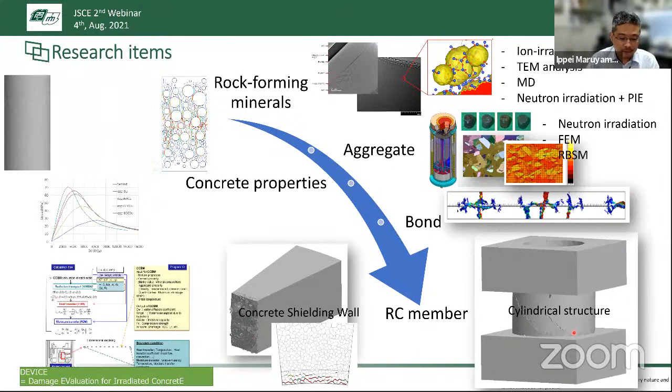Thank you for your attention. This is all my slides.

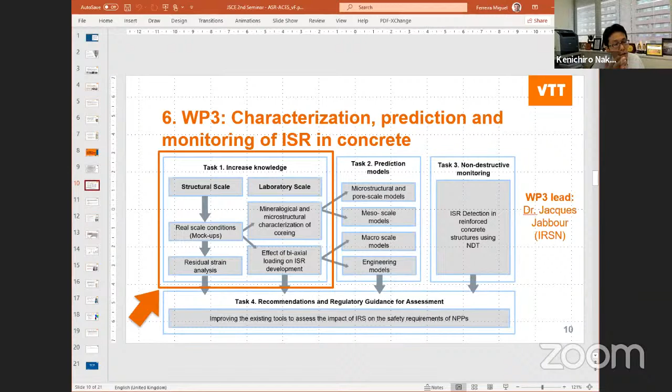So today, you clearly explained the detailed mechanism of the aggregate expansion by the neutron radiation, and also you explained the main factor of aggregate expansion. But I think the main target is existing power plants, so you cannot select the type of aggregate, and I think it's very difficult to control the radiation. After understanding the detailed mechanism, how will you utilize your result for the assessment project?

First, with regard to the NRA project, we proposed several procedures to evaluate the soundness of the concrete structure which is affected by the neutron irradiation.

So if, for example, the calculated neutron fluence is less than 10 to the 19th neutrons per square centimeter, the utility can say that the specimen is safe, or this member is safe.

And even if beyond the 10 to the 19th, we also show some procedures. For example, evaluate the compressive strength deterioration based on expansion of the aggregate, and they can estimate the reduction of the compressive strength and compare it with the design strength. And if this kind of strength is beyond the design strength, they can also say that this is still sound.

And we also propose a soundness evaluation method for structures which are partially affected by the aggregate expansion. So, I didn't...